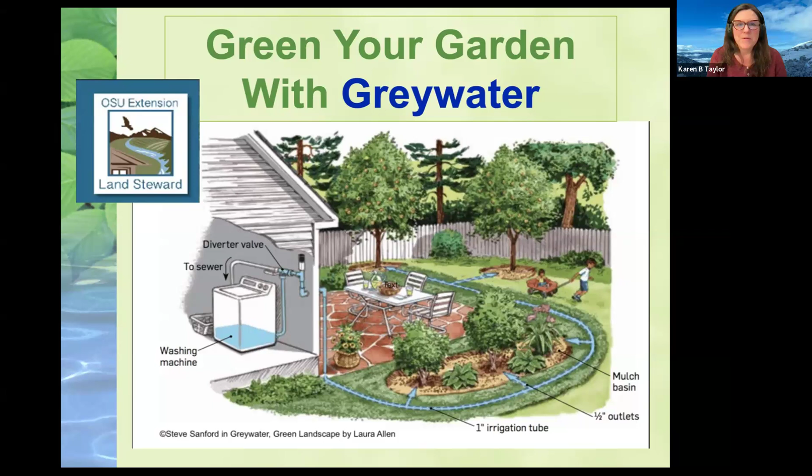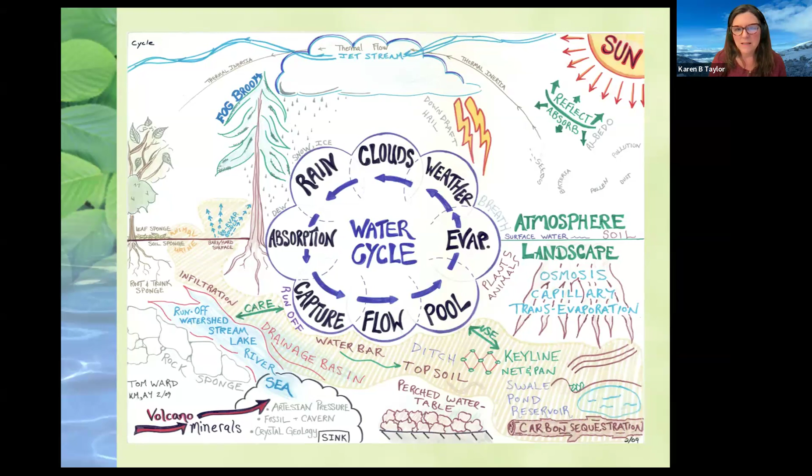I'd like to start with feeling my gratitude for water. We could not survive on this planet without water, and our fresh water is actually a pretty small portion of all the water that exists on this planet. So everything we can do to use our water in a conscious way, bringing in some gratitude and reciprocity in how we treat the water we use every day.

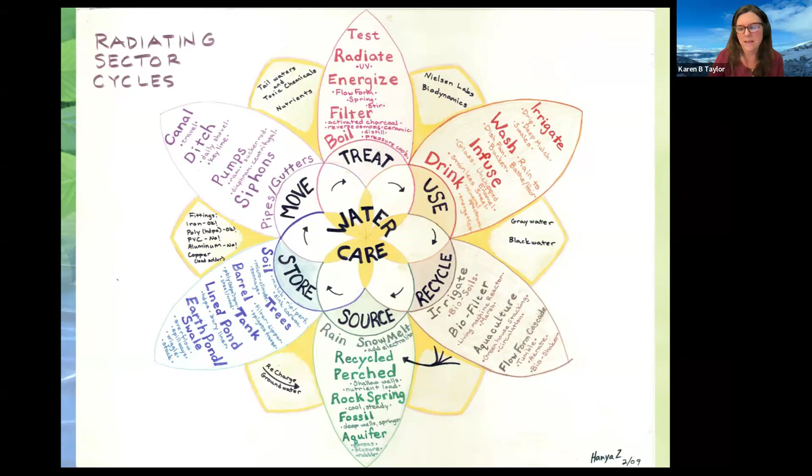So these are the things I'm going to cover: what is gray water, why should we irrigate with it, how do we assess the site for it. I'm going to go over two specific gray water systems, the laundry to landscape and branch drain systems. We'll talk about mulch basins, maintenance and soaps, and permits. Things might be in a different order because I completely changed my slideshow today, but we'll cover all of those things.

So what is gray water? Here in Oregon, we can legally reuse the water that comes from our showers, bathroom sinks, washing machines, and kitchen sink, as long as it is not attached to a garbage disposal. Toilets are not included, and neither are dishwashers, usually because of the kind of detergents used in them.

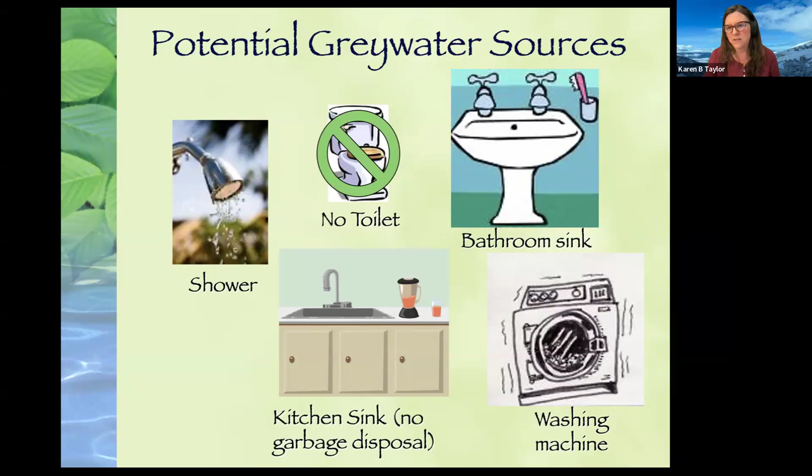Sometimes there's hair, there's the potential for fecal matter when we're washing our hands after we use the bathroom. There's not as much volume that comes from our bathroom sinks. The laundry again is a predictable volume, usually done on a fairly regular basis, so it's something you can calculate. It's really easy to retrofit.

This is probably one of the easiest sources of gray water, but it does have a high concentration of solids, like lint and fibers from your clothing. Certain detergents can be really hard on plants, and there's the potential of it being really alkaline that can also affect plants.

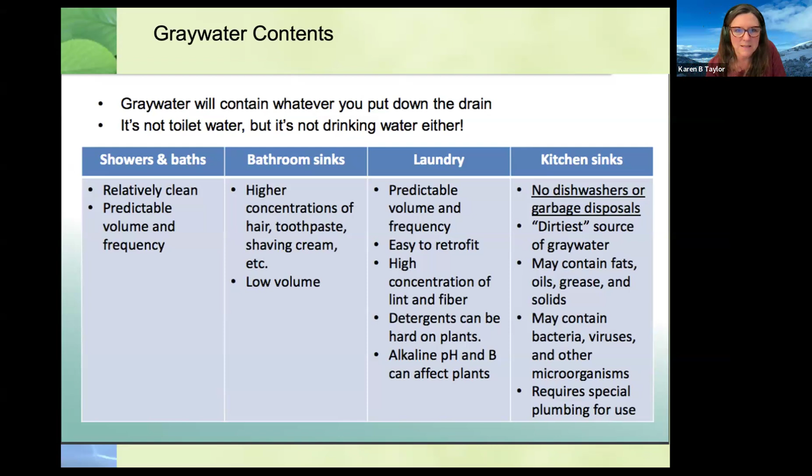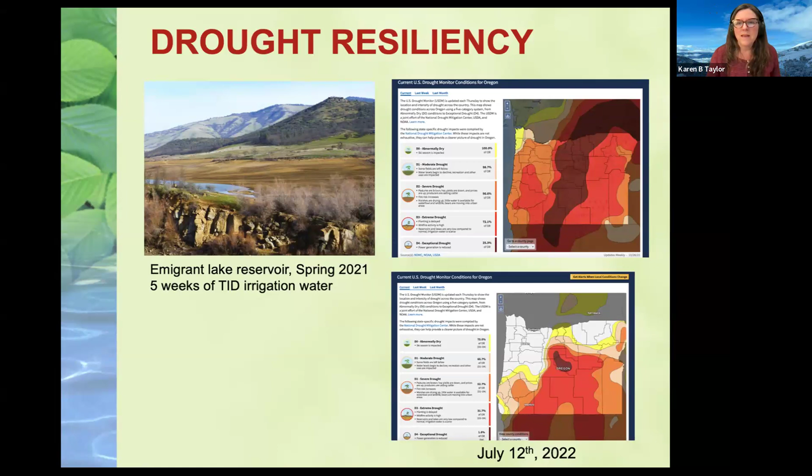So why should we even consider using gray water? Well, these pictures are from 2021 and 2022, and we've had these drought cycles that have been really extreme, so reusing water that you're already using helps lessen the amount of potable water that you're using.

If you're rural and on a septic system, it extends the life of your septic system because you're not putting as much water through it. It's also a great way to irrigate a green zone that's part of a fire-wise landscape. If you want to keep an area around the house wetter, gray water is a good use of that water.

Stepping back to the bigger picture, it has potential for helping watershed health—we're decreasing pollutants going into water treatment plants, there's potential for increasing habitat, and community building, especially since people often install a gray water system as part of a workshop, making it an educational process.

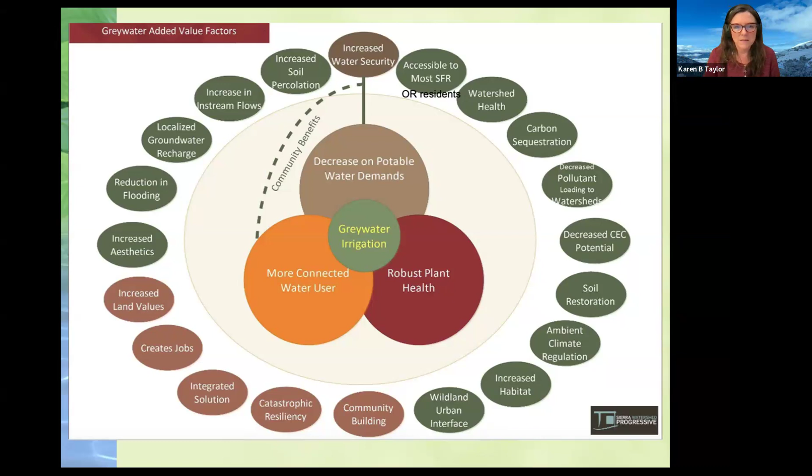One general principle in gray water design is that there are no general principles—they're very site specific, which is why it's important to spend time assessing your site and your water, where it's coming from. This will probably be something I'll put in your checklist.

There are some quick fixes you can do: take the P-trap off your kitchen sink, put a 5-gallon bucket under it, and carry it out to water your plants. You don't need a permit, and it's pretty simple, but you have to keep an eye on it because those buckets fill up quickly. You can also use a dish pan—carry it full of water and dump it on your plants.

A bucket in the shower works too—oftentimes we have to run the shower for a while for the water to heat up, so if you capture that water, you can use it to flush your toilets. And then there's the hose out back from a sink or laundry. These are kind of the under-the-radar systems you can do.

There are times when reusing your water in the landscape isn't advisable. The water quality of your source matters—there are areas high in boron. If your house has a water softener, you're adding salt to the water, and you don't want to put salt in the landscape. It's possible to use potassium chloride instead of sodium chloride, which is better for plants, but more expensive.

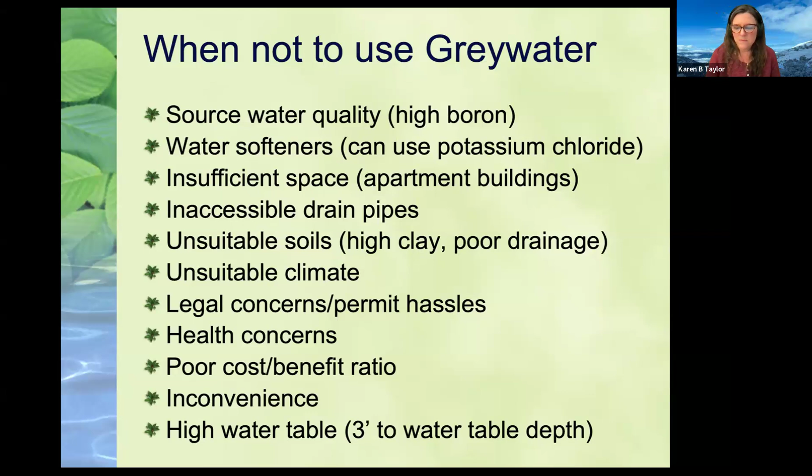But the one thing to really consider is if you have a high water table. This number is actually wrong - I didn't change it yet, but it's actually 4 feet. So you have to discharge water at least 4 feet above a water table. So if you have a water table that's higher than 4 feet, then you might want to do a different kind of system to be able to use your gray water.

Interesting thing though, I went on the DEQ, the Oregon DEQ website today, because I wanted to see if they changed anything with the permits, and now the link is not working. So I left a message with DEQ. I'm not really sure what's going on, but if I learn anything, I will make sure that information gets out to you when we send out the follow-up for this. But what it used to be, or what it's been, is to do a legal gray water system here in Oregon, you must obtain a type 1 permit.

So you're registering your system with the DEQ, and there's a form to fill out, and they just want to know - you send them a sketch idea of what your source water is, what is the receiving landscape, what plants are going to be a part of it, and what's your maintenance program, how are you maintaining that system.

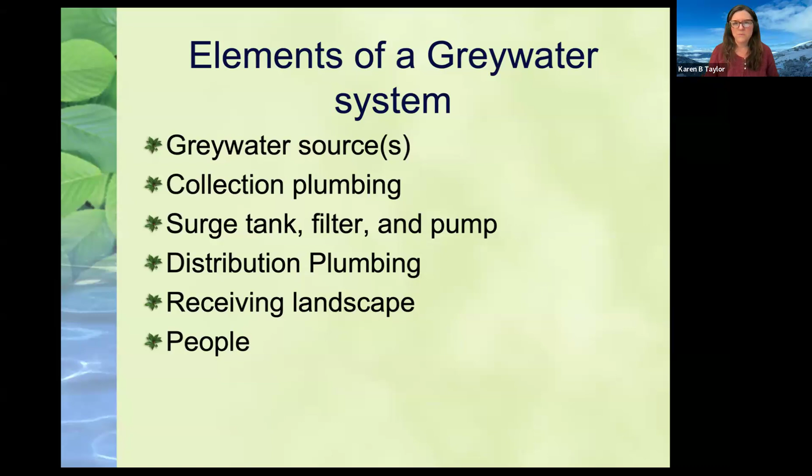And a really important part of a graywater system are the people. Because we're not just letting water flow down the drain and it goes away to your septic or sewer system, there is some maintenance and some awareness that we need to have about how we take care of the graywater system that we're using.

So the two systems I'm going to talk about—I'll first mention a couple of books that are in some of the resources we'll share with you. The first is Create an Oasis with Graywater by Art Ludwig. Art is probably what we'd call the grandfather of graywater, because he really developed and wrote about a lot of these systems. His website is also part of the information we'll share. The second book is Graywater Green Landscape by Laura Allen. I love both of these books. Graywater Green Landscape really walks you through how to design and implement the system. It's got really great photographs. Yeah, they're both really great resources.

So the first system I'll talk about is laundry to landscape. Again, this is really the easiest source of graywater to access, because most of your plumbing isn't in the walls or under the floor—you have access to it. Typically, in Ashland you don't need an additional plumbing permit because you're not cutting into or altering existing hard plumbed pipes. It uses the pump from the washing machine to move it out into the landscape, so you're not completely dependent on gravity and having enough slope—it can move it across a fairly flat landscape. Whereas the branch drain, you really need to have some slope away from your source for it to work.

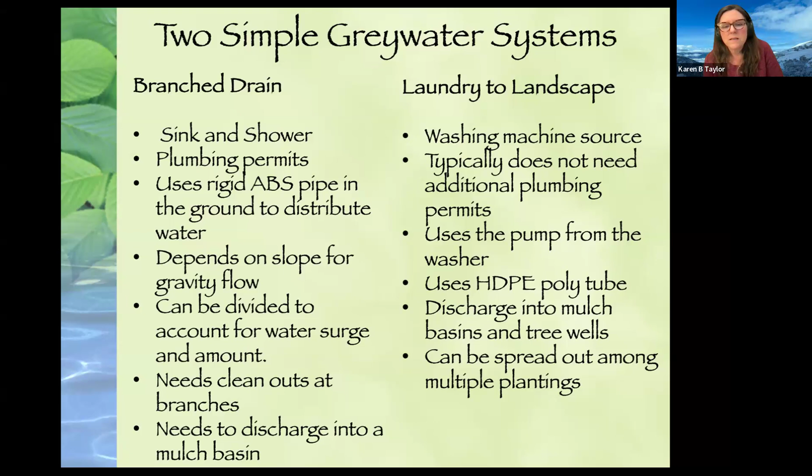The branch drain system is what you would use for sinks and showers. You will need a plumbing permit and potentially a plumber to actually do the diversions. You're using a rigid ABS pipe in the ground to distribute the water, so it really depends on slope for gravity flow. It can be divided, but it's a little trickier because you have to make sure you have a consistent slope, and when you're dividing it, you want things to be level. It's a bit trickier to install, but it still works well. You definitely want to have clean-outs in the branches. Again, both of these systems discharge into a planted mulch basin.

So you've got the three-way valve, and then you can run the pipe if you're on an exterior wall. Ideally, you're on an exterior wall, or in a location where you can run a pipe not too far to an exterior wall. Then you run it through the house, and it includes an anti-siphon or an air admittance valve, which ensures you're not creating a siphon and sucking the water out of your washing machine every time you do laundry.

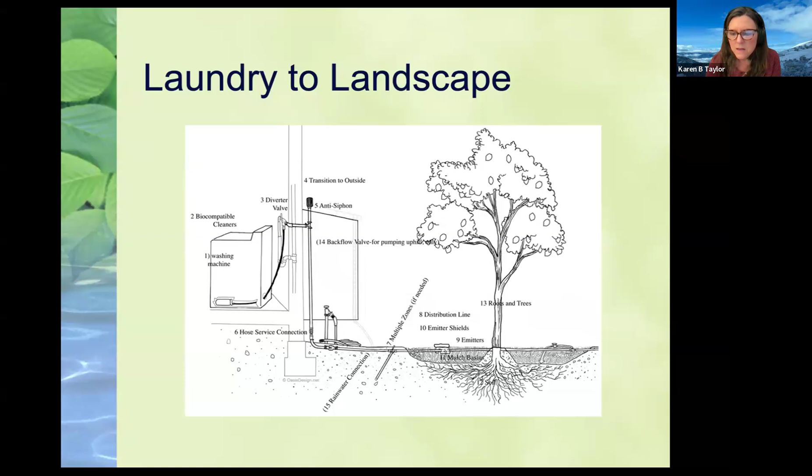So this is just how the laundry to landscape is set up. Again, this is just a look at the three-way valves and different ways of doing a vacuum breaker.

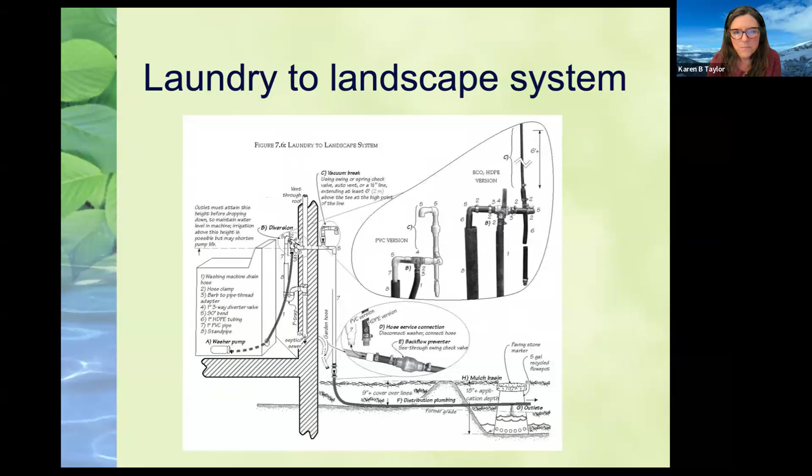So basically, the water line from the washing machine, instead of going into a sink to drain, or into a drain pipe in the wall, you take that water line from the back of the washing machine and attach it directly to the three-way valve. Then this pipe will go back into where the drain pipe originally went, and the pipe that goes to the landscape goes out through the wall into the landscape.

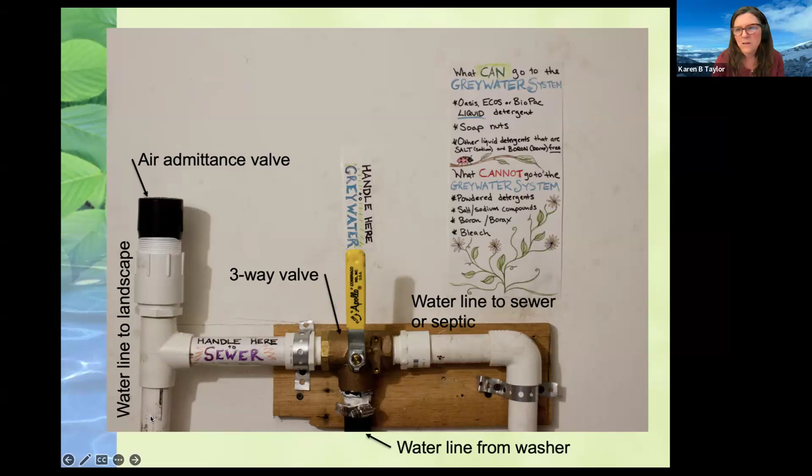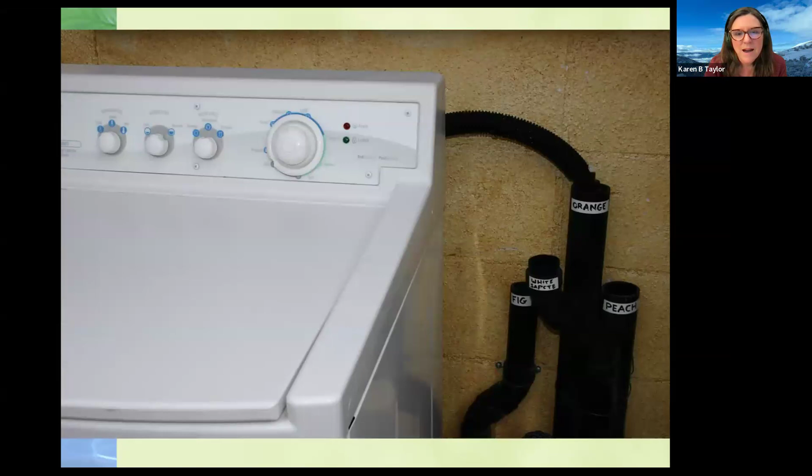This is another system from my friend Brad Lancaster, who wrote the books Rainwater Harvesting for Drylands and Beyond. If you notice, there are 4 pipes there, each with the name of a plant on it. When you do your laundry, you move the drain pipe counterclockwise with each load, and it's watering a different tree each time—each of those pipes goes to a different tree.

I'm gonna drink a little bit of water. Okay.

So the branch drain system, instead of using the flexible irrigation pipe, the HDPE poly pipe, uses rigid pipe—ABS rigid pipe—buried in the landscape.

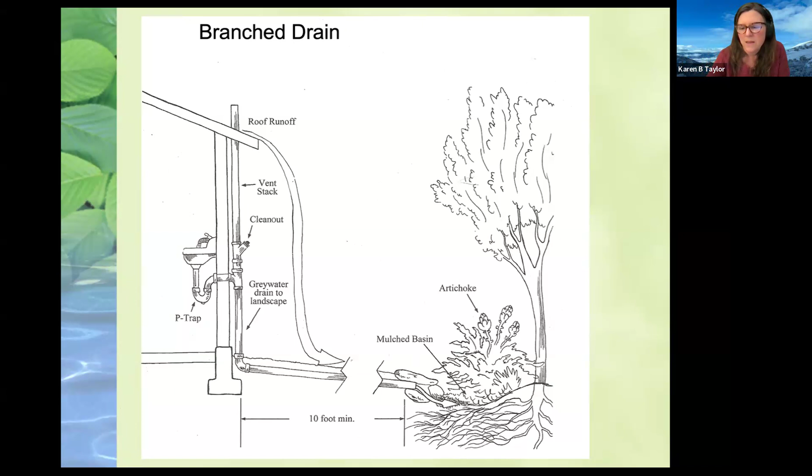But again, it's the same basic idea—you're running the pipe out into a mulch basin. And where the water is being discharged, there are rocks over the end of it so that it's keeping it more subsurface, so animals don't have access to it, and it goes directly into the mulch basin.

And again, this is diverting your sinks—well, actually the sinks are easier than showers, because with a sink you can potentially put a 3-way valve right under the sink and divert it through a wall, so you don't have to get down under the house to divert the water. But you really want to make sure that wherever you divert your gray water, you're not downhill from your toilet. So that's where having a plumber would be ideal.

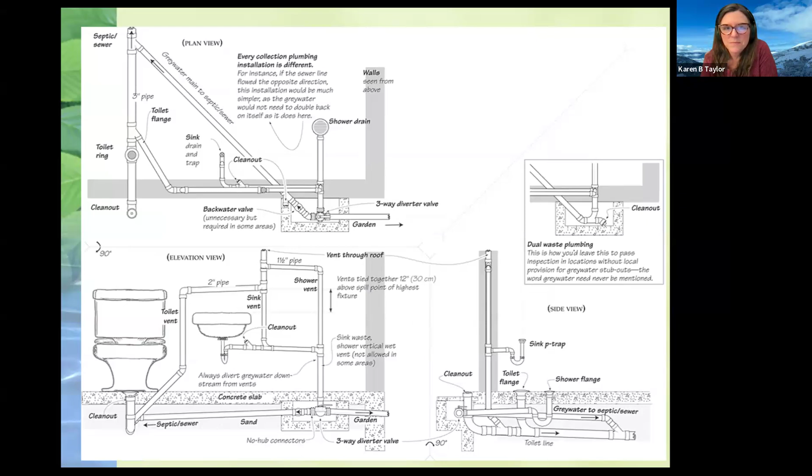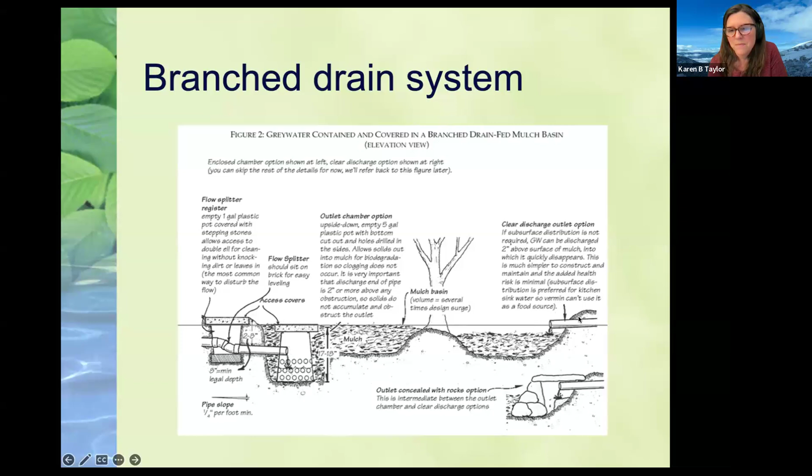This is looking from bird's eye or plan view of how one might disperse gray water using a branch drain system directly from the source plumbing. So here you have a tub, and instead of combining all of the gray water and then dispersing it in the landscape, if you can, it makes more sense to disperse it from the source itself, and then create zones around the house based on where that source water is.

So again, branch drain system uses rigid ABS pipe. Each place where you're dividing the flow of water, we're using a standard plumbing fixture called a double ell, or a twin 90. What makes it good for a graywater system is that we're actually using it backwards. Instead of combining two sources of water into one, it's dividing one source of water into two.

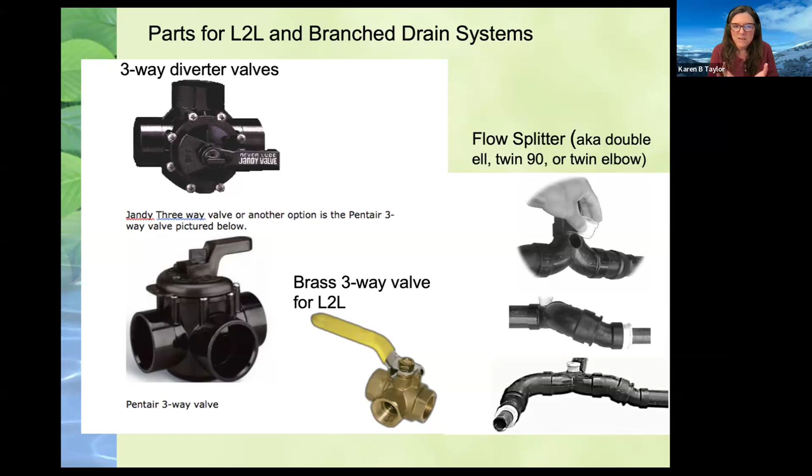People have asked, why can't I use just two regular valves? It's just that there's more potential for blockage if you have them turned the wrong direction. The three-way valves just make the most sense for these systems.

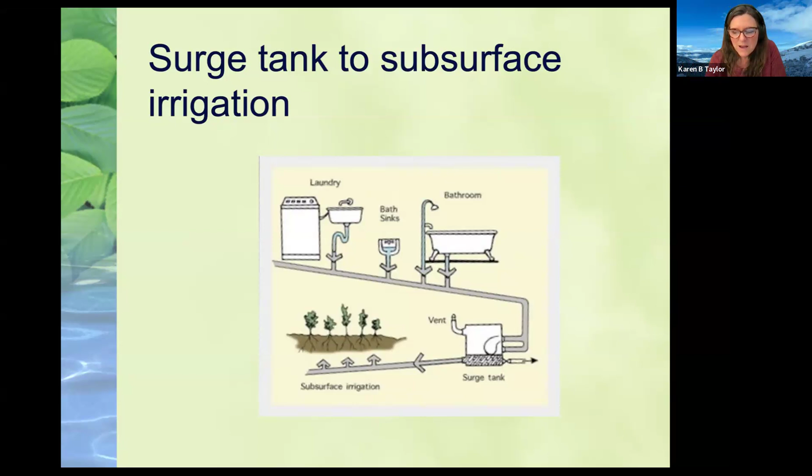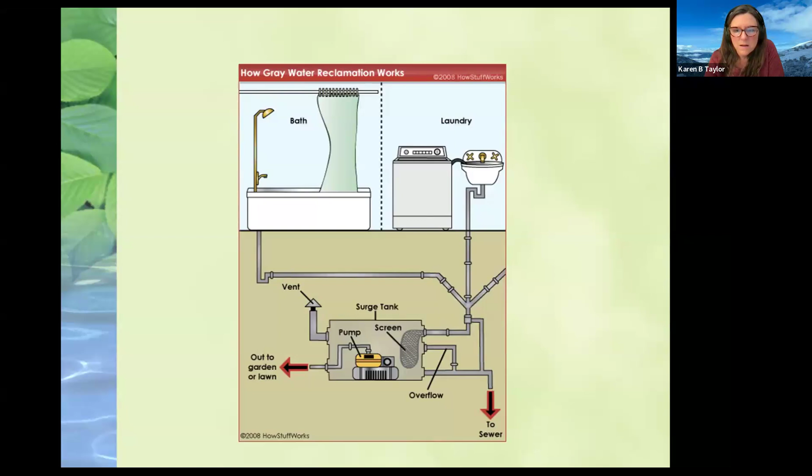Let's just skip that. So anyway, this is looking at a more complicated system with pumps and screens. Again, there's some commercial systems you can use for those.

I'd like to talk a little bit about hugelkultur, because gray water is great in a hugelkultur system. Hugelkultur is a method of using woody debris. I have a whole front yard full of it right now after this last storm. Instead of chipping it all up, I can cut it into pieces and create a basin, bury it, and then mound soil on top of it. Then it becomes a filtration system, and as the wood breaks down, it actually becomes really spongy and holds on to water. It's a system that continues to break down, so eventually, instead of being a mound, it's going to be more like a low raised bed.

So you're planting annual crops on the mound itself, and then perennial crops in the basin that's created next to it.

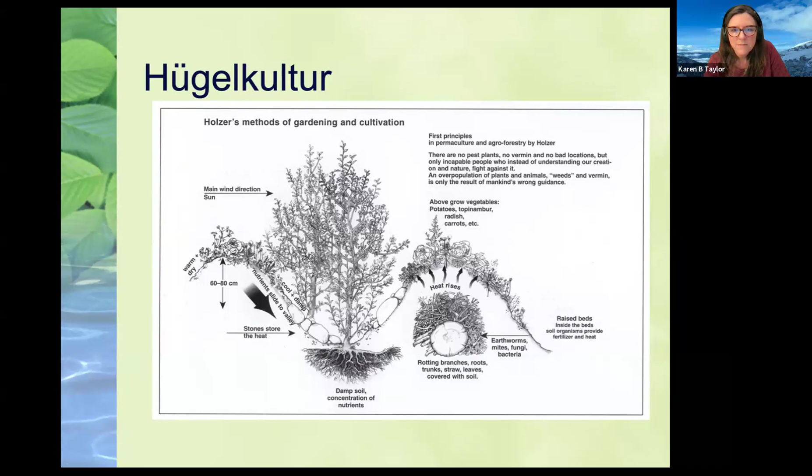All right, so we've talked about determining how much water you have to work with, where you want to move it into the landscape, the conveyance system to get it from the source into the landscape. Then there's maintenance, and how you use the system itself.

If you're doing a kitchen sink, I usually use a screen in the drain so that less food actually goes down the drain, and being aware of how much oils and meat — like I said, my smoothie will kind of build up in the pipe. So just being aware of what goes down the drain, and also there's filters to clean, and having the clean-outs on your flow splitters.

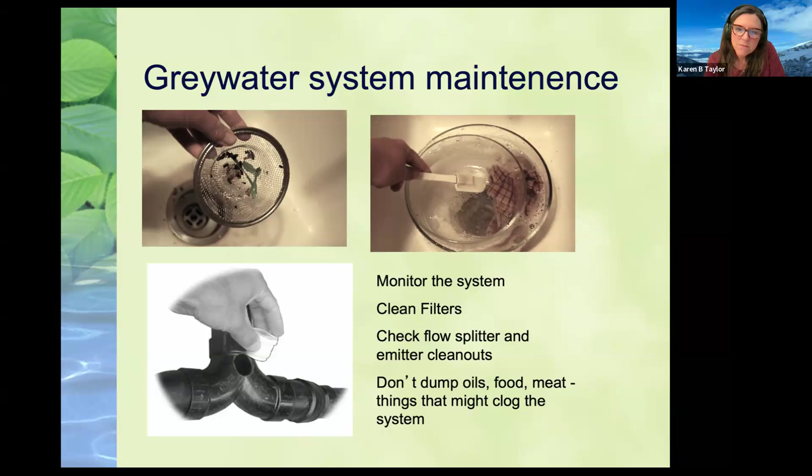And then also going through yearly and checking to make sure that all of the emitters are clear, that there's nothing blocking the emitters at the end. Sometimes I have critters that fill up anything — if you have gophers, they will definitely fill up your valve boxes. So that's something to check on maybe a quarterly basis.

I'll talk a little bit about what kinds of soaps to avoid. I've included this as one of your handouts that will be sent with the follow-up. We really want biodegradable soaps that are free from salts and sodium compounds, boron, borate, borax, and chlorine bleach. Ideally, no petroleum distillates, sodium-based water softeners, and antibacterial soaps and cleaners, because the important part of the filtration system is all the microbial activity in the soil, and antibacterial soaps kill a lot of those microorganisms.

So that's why we have the three-way valve. It's about becoming more aware of what is going into the water that's going onto the plants.

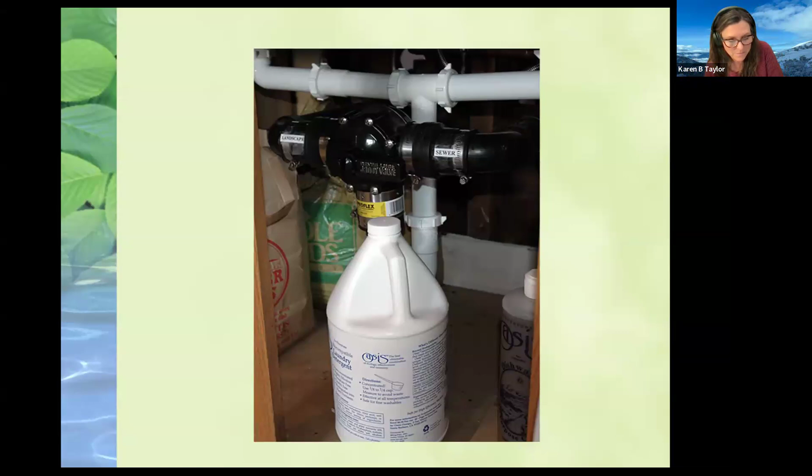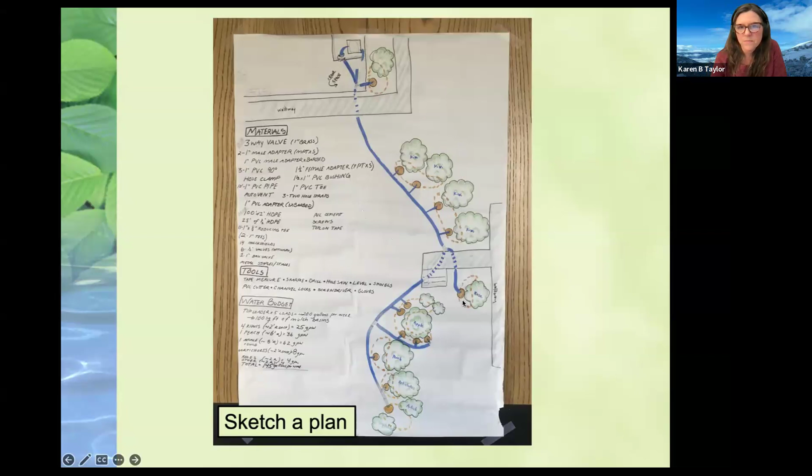So I think that is it. Oasisdesign.org has all sorts of information about graywater and other things that Art's been working on. Greywater Action is an organization that Laura Allen was one of the co-founders of. They're teaching online classes and there are certifications, some in-person certifications for people that want to become installers. That's something we could really use around here, people trained and knowledgeable to install systems like this. And then the DEQ has a whole bunch of information about how to design the system as well, and that will be a part of your handouts, all of this information.

You're going to receive this PowerPoint slideshow in the follow-up. And a disclaimer, I usually put slides that I'm not using at the end of my presentation, so there's actually a slide for a workshop from last year, but we might end up doing a workshop this year. Anyway, I'm going to stop the share now, and we're open for questions if anybody has any.